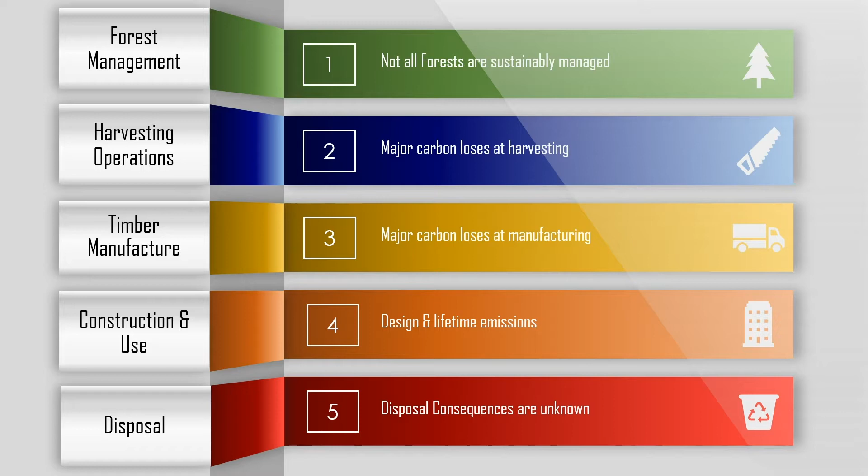And finally, the carbon emissions associated with the disposal and landfilling of wood products are very poorly understood. We don't have a good handle on what happens to the carbon in wood products when they end up in municipal landfills. There's a great deal of speculation in what is really a crucial stage for carbon accounting purposes.

I'm going to start by briefly covering the concept of carbon neutrality. Emissions from burning biomass or biofuels are called biogenic emissions. Now, carbon neutrality is the principle that when biomass is burned for energy, or the carbon from biomass is released into the atmosphere in some other way, these emissions are not counted towards the final carbon footprint of a product or process.

The rationale behind this idea is that these emissions represent only the carbon that was initially absorbed by plants or trees while they were growing, and that these emissions will be fully reabsorbed by new growth later on. So this forms a hypothesis, the idea that biogenic emissions have a neutral climate impact.

But currently, biogenic emissions are 100% exempt from final emissions figures, for instance on environmental product declarations. And what this means is that regardless of how many emissions a product or process is responsible for, as long as they're biogenic in origin, they aren't a part of the official carbon footprint of the product. On paper, they don't exist. And this accounting standard gives wood products manufacturers an advantage in carbon accounting because a large portion of the emissions associated with the production of wood products are biogenic.

So carbon neutrality is in fact an accounting rule. It does not describe real-world emissions. Exempting biogenic emissions from the carbon footprint of a product on your balance sheet doesn't mean they don't exist. A carbon molecule from a biogenic source is identical to a carbon molecule from a fossil fuel source, and they have identical climate impacts.

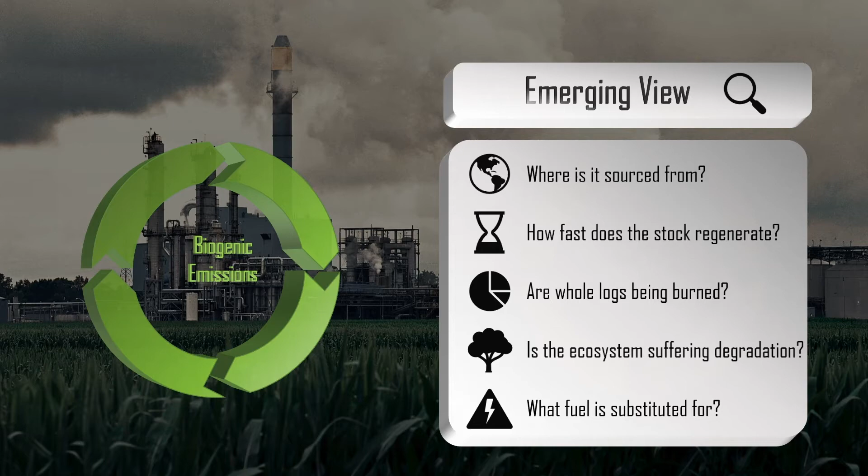This accounting framework also incentivizes the logging of forest land rather than the conservation of forest land, and this can be counterproductive. For instance, following the principle of carbon neutral accounting, there's no difference between leaving a healthy standing forest that sequesters a vast amount of carbon to mature or clear-cutting that forest and burning the wood for energy. On paper, these have identical carbon consequences, zero net emissions.

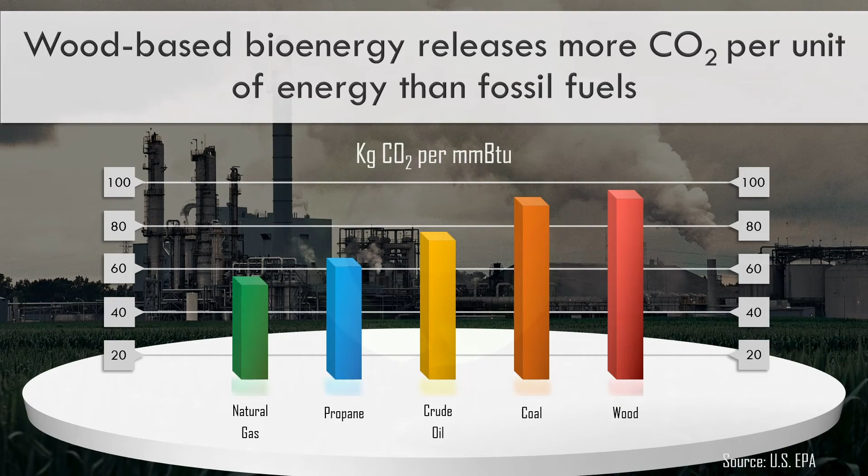Now, another concern that researchers have with the concept of carbon neutrality is that wood-based biofuels are just not very efficient. While there are differences between types of wood-based fuel or type of coal, for instance, in most cases, per unit of energy produced, burning wood or wood pellets actually emits more greenhouse gas emissions than any source of conventional fossil fuels. So there's a growing alarm that declaring all wood-based bioenergy to be carbon neutral will actually increase emissions in the air while decreasing them only on paper, because you need to burn a lot more wood to produce a small amount of energy.

Now I'm going to break down the life cycle of wood-based building products into 5 distinct stages. The first one is forest management. Second is the point of harvest or logging operations. The third is timber manufacture, where harvested roundwood is converted to various forest-based products. And the fourth is the construction and use phase. This is where we're going to discuss the role of wood in the built environment itself. And finally, disposal, or end of life.

So our story is going to begin in the woods. Forests are some of the Earth's most valuable carbon sinks. They're sometimes described as the lungs of our planet. Now, it's almost always assumed that lumber is being harvested from a sustainably managed forest. But unfortunately, from a carbon management perspective, not all forests are sustainably managed. In fact, what constitutes a sustainably managed forest is subject to much debate.

The old-growth forests of the Pacific Northwest are some of the most productive carbon sinks anywhere on the planet. They can be thought of as vast reserves of carbon capital. And once this carbon is emitted or spent, it's gone. We typically think about wood as a renewable resource because, of course, trees grow back, but these old-growth forests are not a renewable resource by any definition. If you want to renew the carbon stock of a harvested 200-year-old tree, you need to wait 200 years.

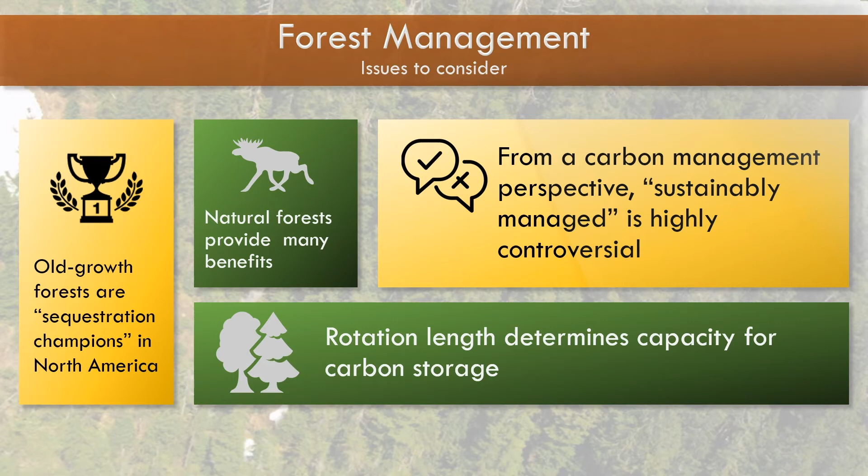Now, one of the premises of sequestering carbon in wood-based building products is that from a climate perspective, mature trees are less valuable than younger trees. It's argued that they don't grow as fast or absorb carbon at as high a rate, but there's just not good evidence that this viewpoint is viable. Although the rate of growth will decline after a certain age, the absolute quantity of carbon uptake often continues to increase, and this is because a smaller percent in growth in a massive tree adds a lot more biomass than a large rate of growth in a small tree. And so even very mature stands, well over 100 years old, continue to act as net sinks of carbon.

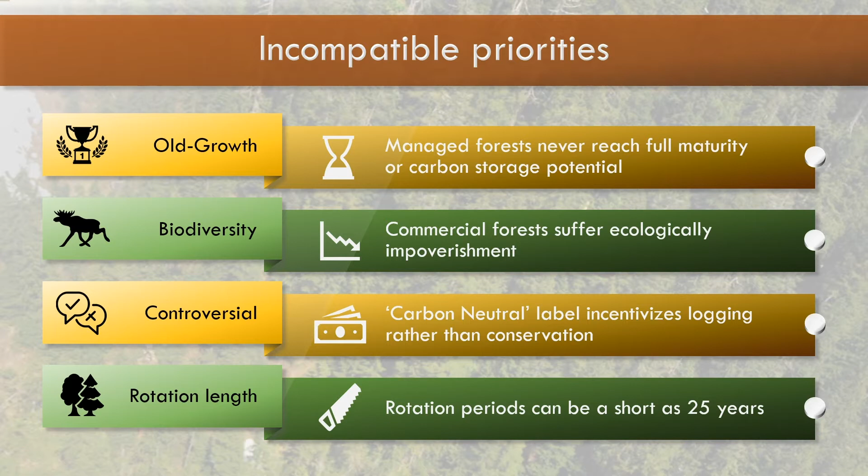In the Pacific Northwest, rotation periods, which are the years between harvests, can sometimes be as short as 25 or 30 years. And while this can be highly economical, it has minimal value from a carbon management perspective. So unfortunately, there's a disconnect between rotation lengths that are good for carbon management and rotation lengths that are economically preferred. Now we're going to talk about some of the effects of logging on forest carbon.

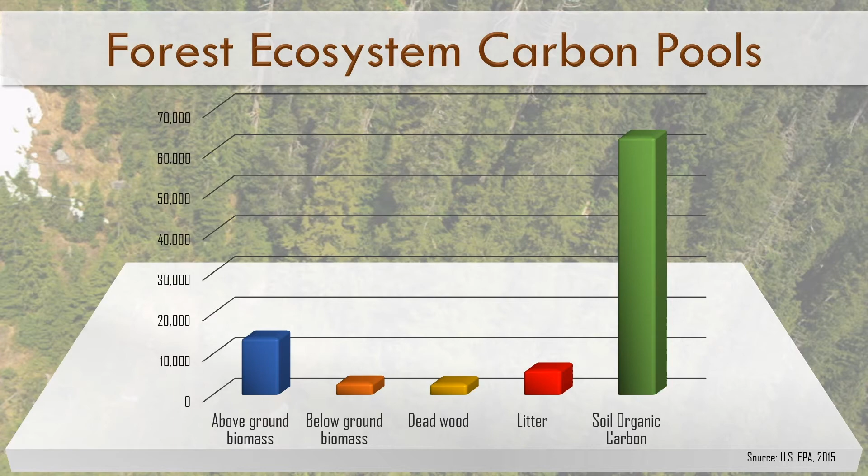Now, so far we've only been talking about carbon in the trees themselves, but carbon is actually stored in the forest ecosystem in 5 different carbon pools. This data here from the US EPA shows that soil organic carbon is by far the largest carbon pool in the forest. On average, it accounts for about 50% of total forest carbon across the United States. The carbon stored in the merchantable portion of trees is only a small fraction of total ecosystem carbon. And so in order to account for the full impacts of transferring carbon from forests to the built environment, clearly a much more comprehensive view of forest carbon is needed.

Most of the studies on carbon sequestration in wood products omit the disruptive effects of logging on the soil carbon pool, which, as we saw, is the largest pool in the forest, despite current evidence that harvesting reduces the level of carbon in the soil.

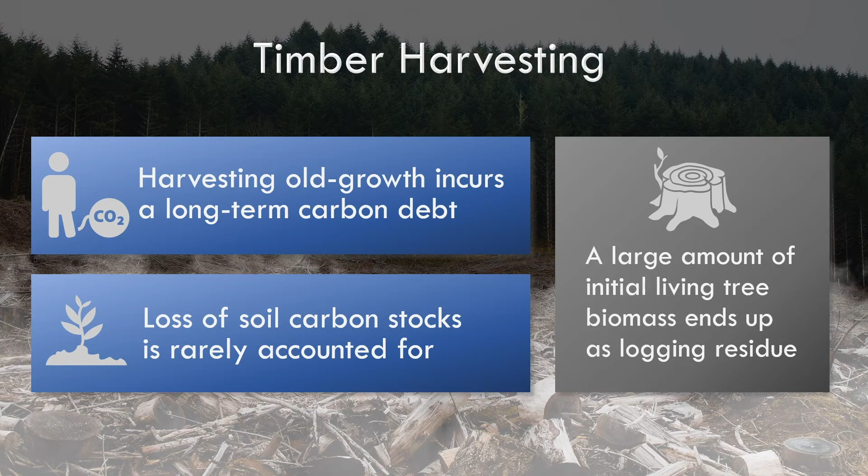These are effectively emissions from the soil to the atmosphere. During a harvest, only a portion of each tree is removed from the forest for processing. A significant portion of the biomass in the initial living tree is not merchantable. It has no economic value, and it's either left in the forest to decompose or is burned. These emissions also typically go unaccounted for.

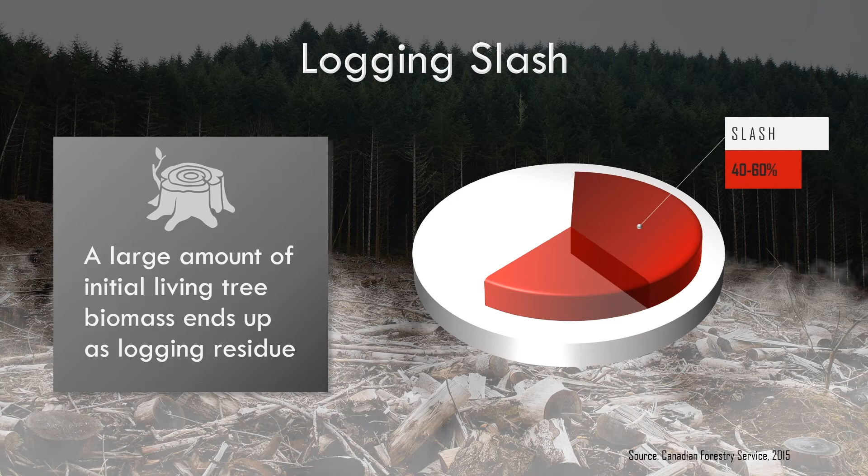Now, current forest management practices mean that reforested acreage in commercial plantations will never reach the level of carbon sequestration attained by old-growth or primary forests. So taking this into account, a complete review of the carbon data that includes these terrestrial impacts can show that there's actually a carbon debt in existing wood products and structures.

While living trees sequester carbon, wood products are the result of an industrial process that emits carbon. And these emissions occur at each of the 5 stages that we identified earlier. First, emissions from collateral damage to other carbon pools in the forest ecosystem during harvesting, emissions during the manufacturing process, losses during the construction process, as well as maintenance and replacement costs during the use phase, and at end of life when they're eventually disposed of.

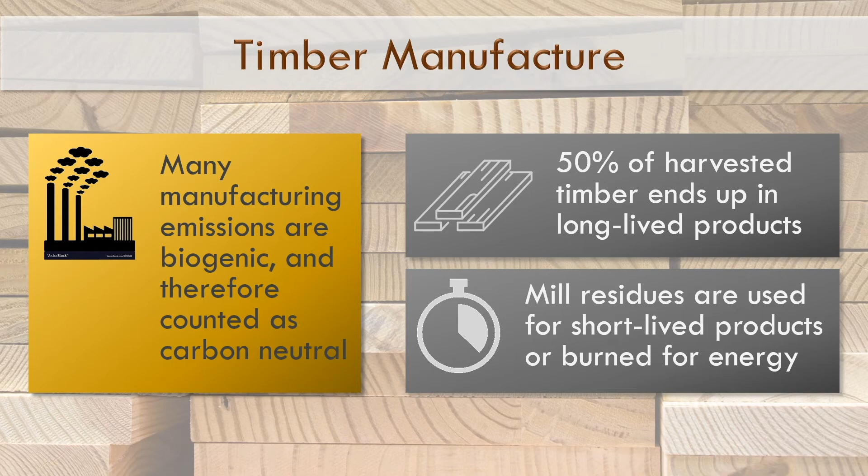We're going to look at emissions during the manufacturing stage now. At the primary manufacturing stage, only about 40 to 50% of large roundwood logs are converted to lumber. The remainder, called mill residues, are burned for energy to power the mill or sold to pulp and paper plants for use in products with little to no long-term carbon storage value. These emissions from wood waste and wood fuel are of course deemed carbon neutral and omitted from the final emissions footprint of the mill's operations.

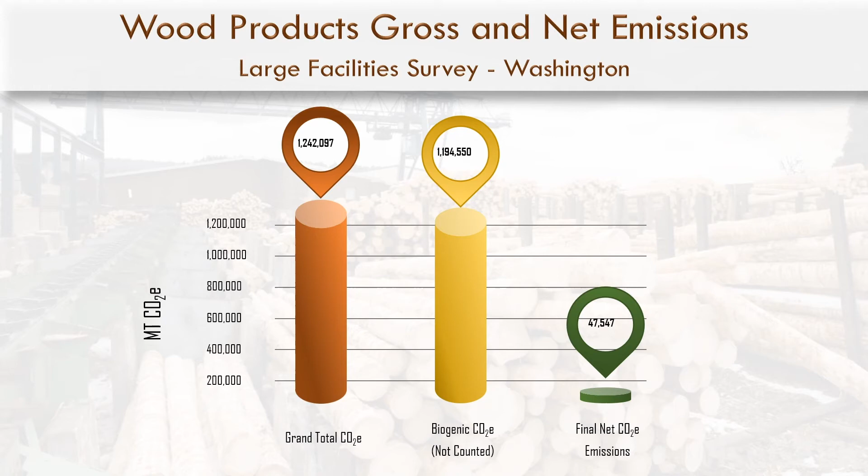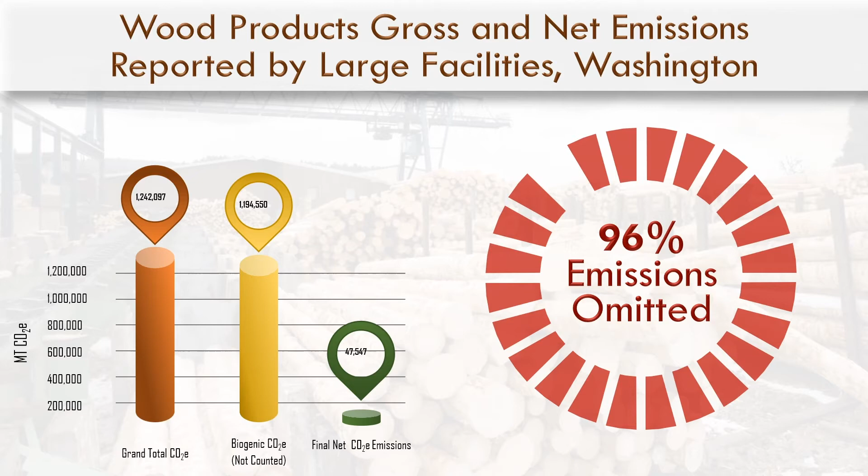Here's an example of the carbon neutral emissions from large facilities emitters in Washington. This chart breaks down emissions between fossil fuel and biogenic sources. As you can see, virtually all of the emissions, about 96% of them from Washington mills, come from burning wood-based fuel. Well over 1 million metric tons of greenhouse gas emissions get written off of these carbon balance sheets. These emissions that are omitted from final figures are equivalent to burning nearly 1.3 billion pounds of coal based on the EPA's greenhouse gas equivalency calculator.

And while new growth may eventually reabsorb some or even most of these emissions, the process will take decades or even a century or more. In the interim, the greenhouse effect of these emissions are every bit as real as those from fossil fuels.

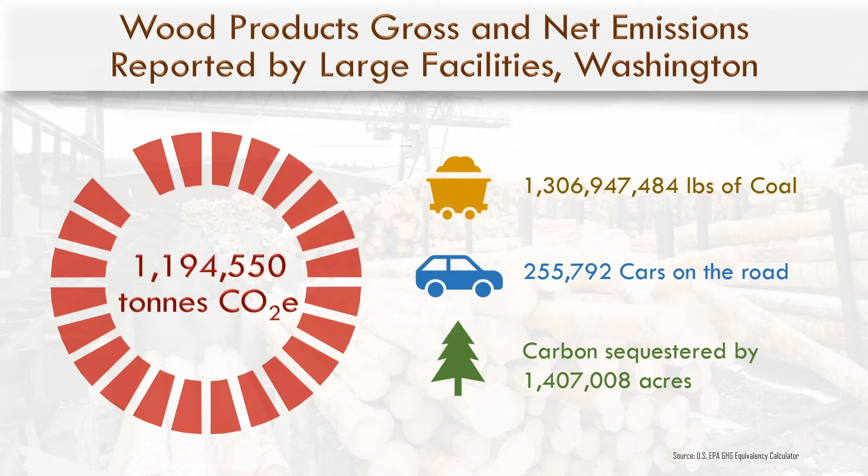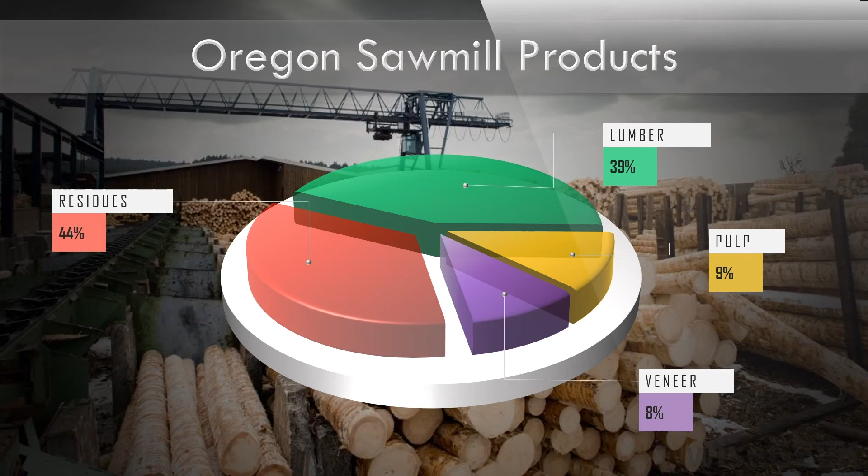This chart shows the outputs from primary manufacturing facilities in Oregon. Approximately 39% of the logs that enter primary manufacturing facilities are converted to lumber, 8% to veneer, and 9% are sent directly for pulp, paper, and board production. Now 44% of the biomass that enters the mills ends up as residue, and these residues are typically either burned for energy or sold to pulp and paper plants for the manufacture of other short-lived products. Now, while there are serious efforts underway to grow the market for mill residues, the options don't allow for much long-term carbon storage.

So now that we have a more complete picture of the emissions and carbon costs associated with the sourcing and manufacturing of wood products, we're going to talk about the role that a given material plays in the overall carbon footprint of the built environment. The reality is that the carbon footprint of the built environment goes well beyond carbon accounting for specific building materials. The energy and emissions associated with all the processes and materials from their sourcing to the completed construction of a building are called the initial embodied energy of a building.

And initial embodied energy accounts for somewhere between 10 and 20% of a building's lifetime emissions. So when we're talking about substituting one material for another, we're really only talking about an attempt to address 10 to 20% of the issue. This is only the tip of the iceberg.

Discussions of carbon sequestration often frame the issue as one between hypothetical wood buildings and concrete or steel buildings. But in the real world, there are practically no such structures, those built exclusively out of one material type, that is. All buildings are constructed with a mix of materials. A single building may contain 60 different basic materials and over 2,000 different components. Each of these have their own embodied energy, costs, and longevity. In reality, all building materials are indispensable.

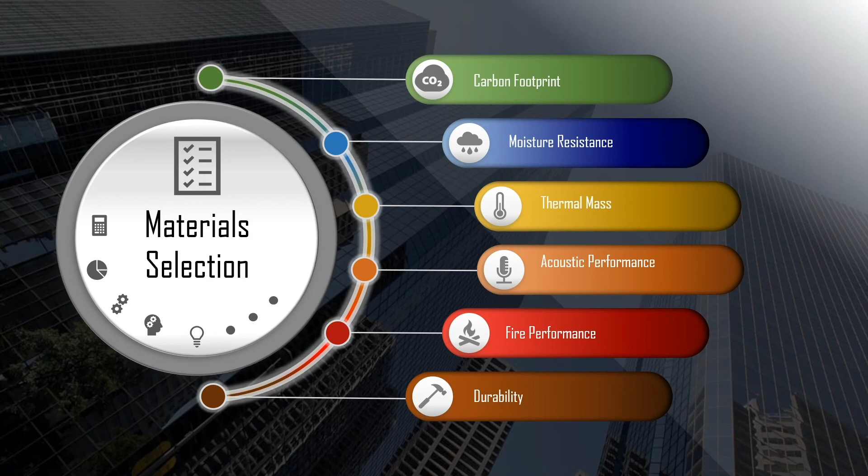Because there are all these attributes to consider, each material has unique benefits and unique drawbacks, and design decisions therefore always involve a series of complex trade-offs. The initial carbon footprint of a given material is only one factor that needs to be considered in this process. And just as choosing the least expensive material is not necessarily the best option for a particular component, neither is simply choosing the material with the assumed lowest initial embodied energy.

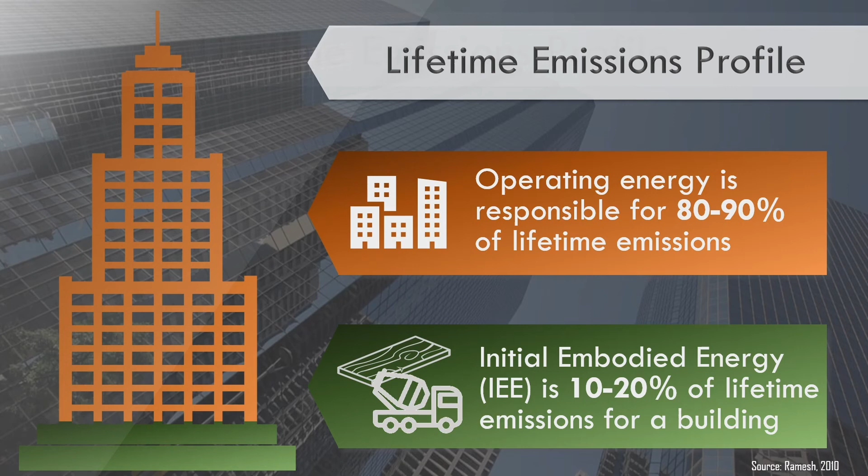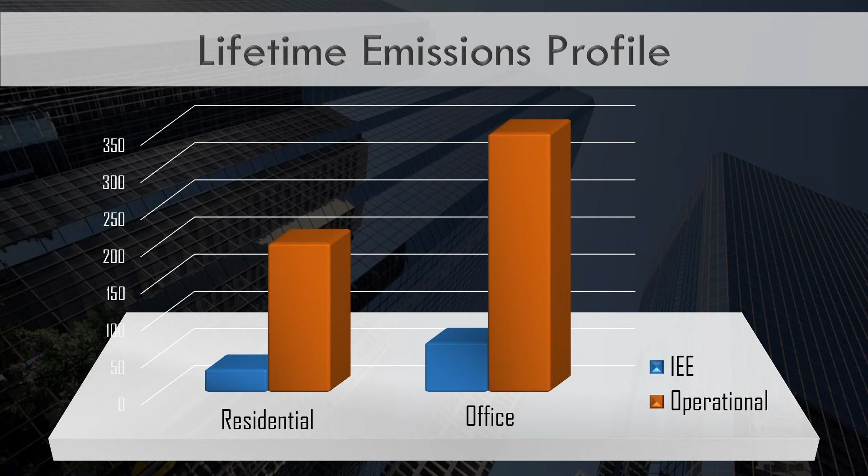While the initial embodied energy of a building accounts for 10 to 20% of lifetime emissions, operating emissions, the energy needed to heat, cool, and power the building, account for 80 to 90% of lifetime emissions. In a full life cycle assessment, from the sourcing of raw materials to the decommissioning of a structure, the differences between material types in terms of lifetime emissions are marginal. It's a small part of a much bigger picture.

The factors that primarily influence the lifetime emissions of a building are design, which in part determines the operating efficiency of the structure, location, orientation, the electricity source for the building, the climate, which dictates heating and cooling needs, the cumulative repair and maintenance required on your components, and the longevity of the building and its structure. Over the service life of a building, the emissions associated with the maintenance and repair of building components can actually exceed the emissions from their initial embodied energy.

A highly effective way to reduce the contribution of initial embodied energy to lifetime emissions is to ensure the longevity of the structure. Building for resilience is important, and this is part of the bigger picture that I'm emphasizing, that of building better buildings.

The last stage in the wood product's life cycle is disposal, and there are a variety of disposal options for wood products. The most beneficial from a climate perspective is recycling or reuse. Wood products can also be burned as a waste disposal option, sometimes to generate energy. And the third option is burial in a landfill.

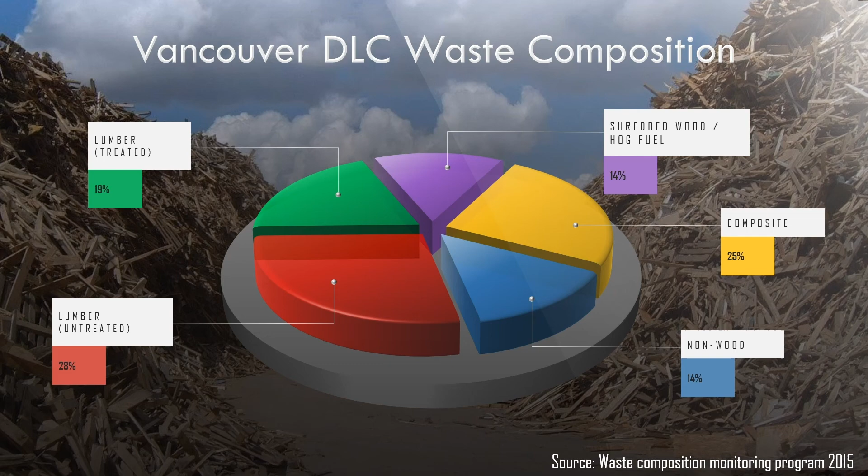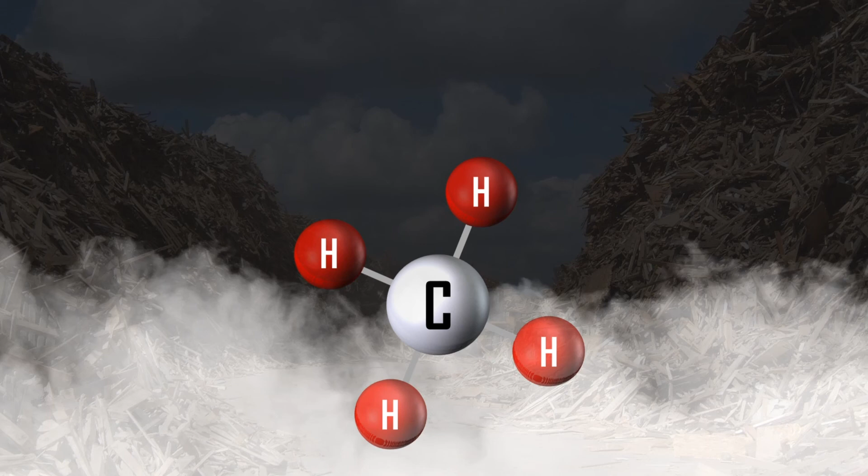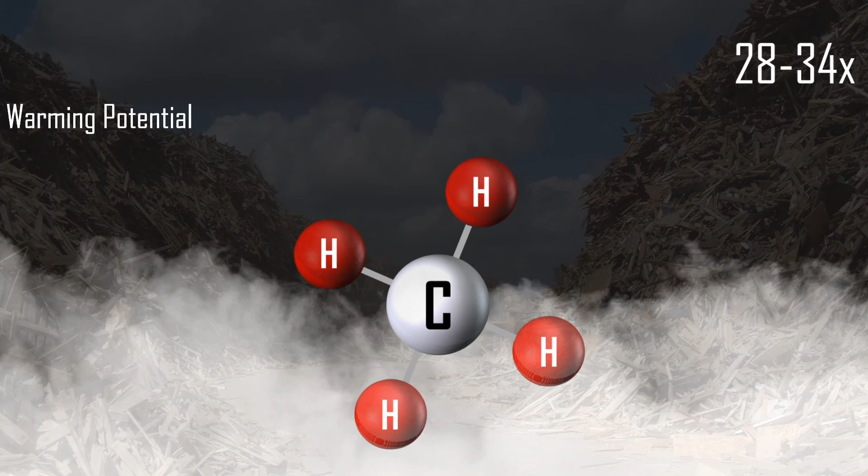Currently, far too much wood waste ends up in a municipal landfill, and from a carbon accounting perspective, this is highly problematic. Under anaerobic conditions, wood and other organics are subject to decomposition by methane-producing bacteria. In this process, the carbon is converted to approximately equal parts carbon dioxide and methane gas. Methane has a 100-year global warming potential of 28 to 34 times that of CO2. And rising methane emissions from solid waste disposal sites are a serious and growing global problem.

Now, the concern with wood products in landfills is that we don't really know how much methane they're going to ultimately produce. For instance, how much of the carbon in the wood is eventually converted to carbon dioxide and methane. And secondly, how much of this methane actually escapes the landfill? How much is recoverable with capture and flaring systems? As it stands, there are some laboratory models that estimate methane emissions from wood products, but the differences in these estimates based on the different models range tremendously, by well over an order of magnitude.

Now, one thing to consider is that because of the damp and wet climate conditions in the Pacific Northwest, wood products can be expected to decay more rapidly. This means that results from studies conducted under different or drier conditions may not necessarily apply here. When it comes to the final fate of wood products in landfills and their ultimate carbon footprint, we just don't know enough to draw firm conclusions.

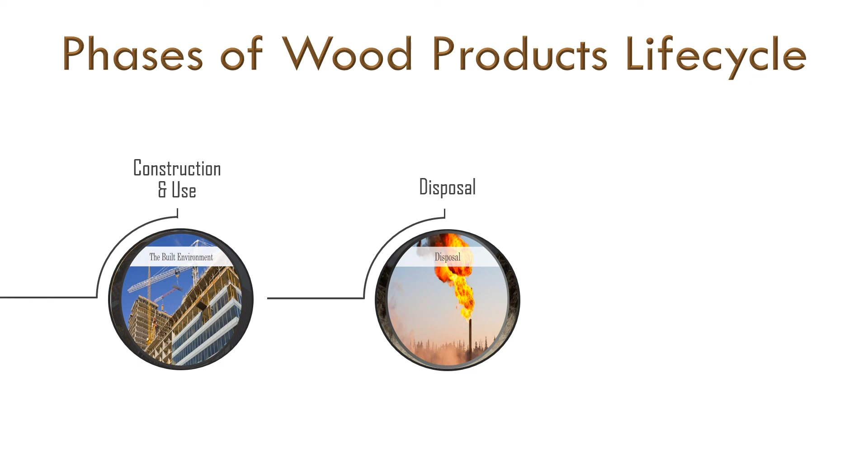So in closing, this flowchart is going to help us follow the carbon through the wood product's life cycle and summarize the key takeaways. At each step in the process, wood products are responsible for emissions even if they're not always accounted for. So in the final analysis, a number of researchers have tracked the flow of carbon from forest to finished product. And studies show that about 15 to 30% of the carbon that was once stored in the living tree ends up in a long-lived building product. So the transfer of carbon from the forest ecosystem to the built environment is just not very efficient.

This process causes carbon emissions from a number of other carbon pools that are not always accounted for. For instance, the irreversible loss of old-growth carbon capital, carbon emissions from soil pools caused by logging, the potential rise in real emissions from the use of wood-based biofuels, and the vast uncertainty in final methane emissions from these products in landfills.

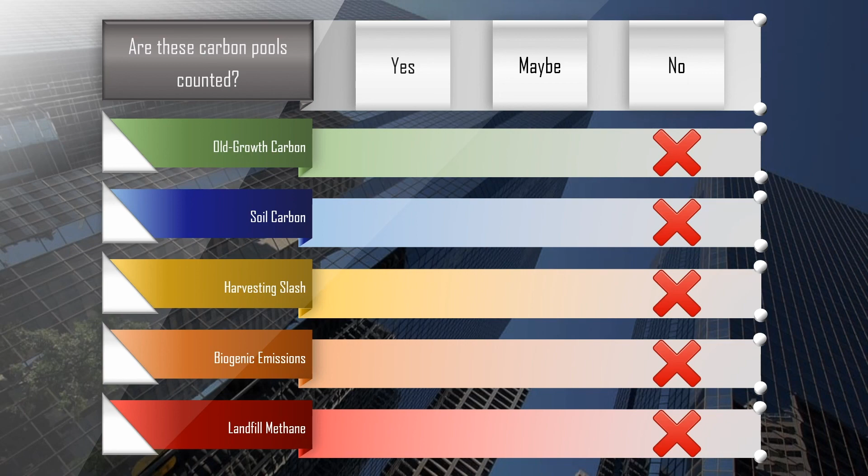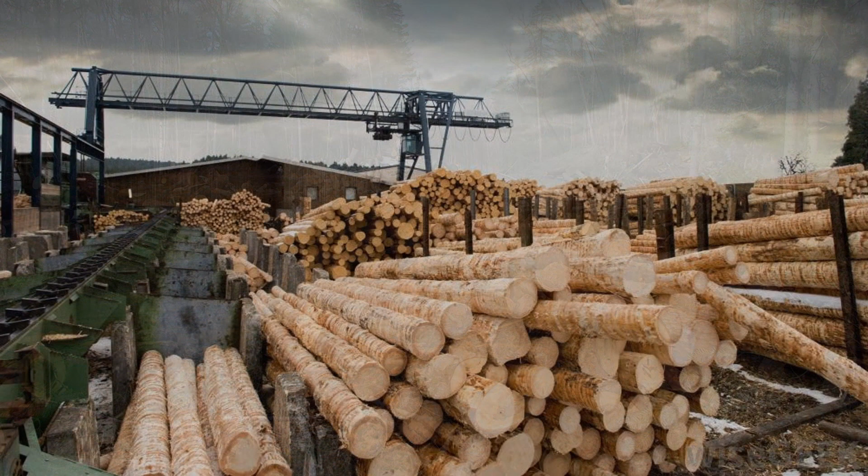At the end of the day, what we can safely say when we talk about carbon sequestration is that living trees sequester carbon, and wood-based building products are the result of an industrial process that emits carbon. A more realistic and comprehensive approach to greening the built environment is one that's less concerned with material substitution, and rather one that emphasizes building more resilient and more energy-efficient buildings.